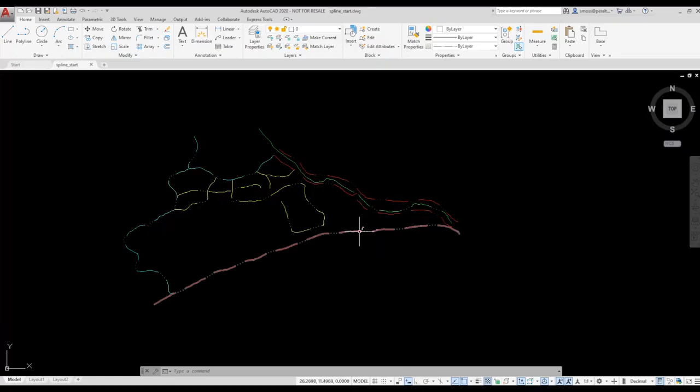I select one of the splines. Notice that the CV frame is currently set to hide. I'm going to change that to show. I close the Quick Properties dialog and zoom into the selected spline. Now you see the control vertices used to designate the shape of the spline.

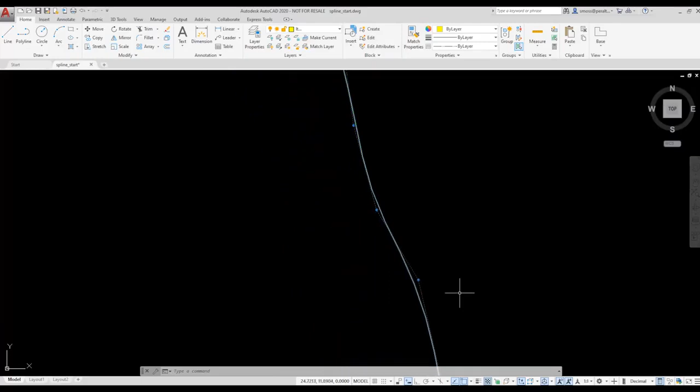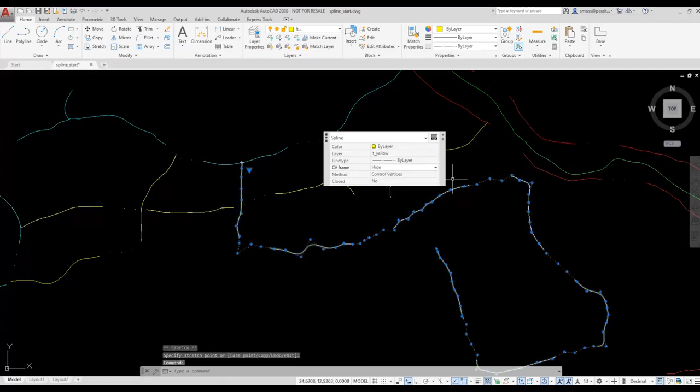These control vertices aren't plotted, but hiding them can make your drawing easier to read, and you can turn on visibility, like I just did, to make it easy for you to modify your spline. To modify the spline, just select a control vertex and adjust its position. To hide the control vertices, just reselect the spline and switch the CV frame back to hide. Now when I zoom back in, you don't see the control vertices as they are hidden.

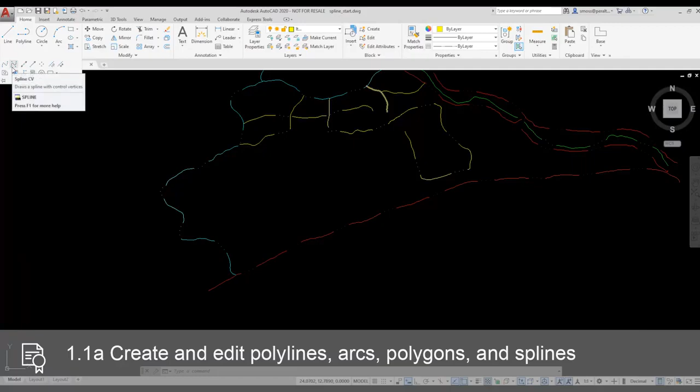I'm going to switch to the LT yellow layer on the layer drop-down list located on the ribbon. I'm going to be placing a spline. The spline tool is located on the extended panel area of the draw panel on the home ribbon. There are two spline tools available, one to create a spline using fit points and one to create a spline using the CV method. You can also just type SPL to start the spline command.

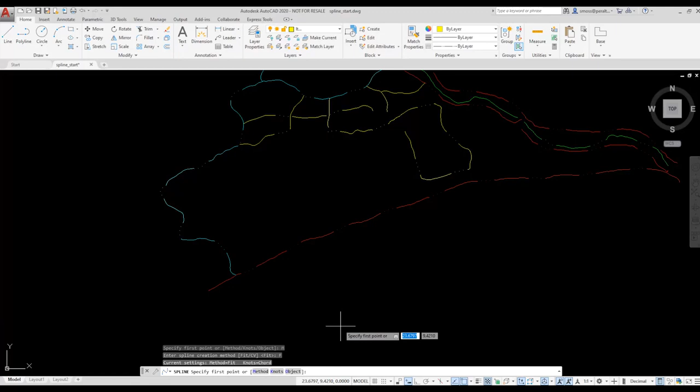I type SPL to start the spline command. On the command line, I have three options: method, knots, or object. The current method is set to fit. I can right-click to select method to change my method, or I can left-click on the word method in the command prompt. I am now provided with two choices, fit or CV. I select fit. I can select fit from the right-click method, or press enter to accept as the default.

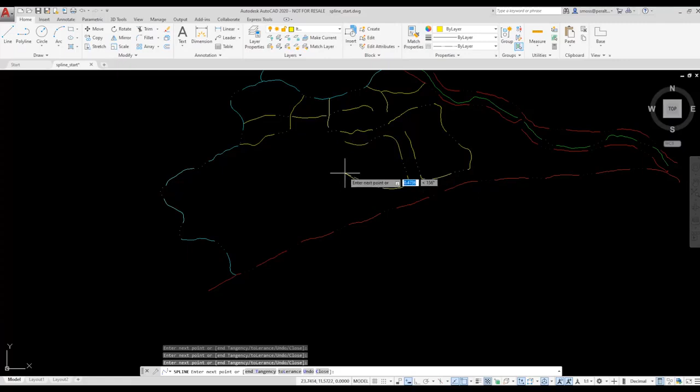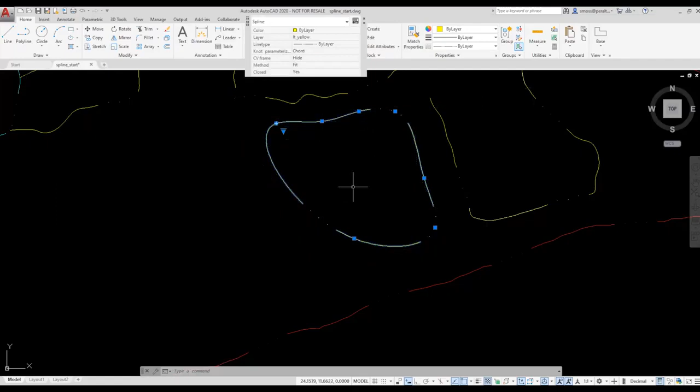I select some points, then right-click and select Close. I select the spline I just drew. The Quick Properties dialog displays that the spline uses the Fit method and the CV frame is set to hide. I change the CV frame to Show. So even though I created the spline using the Fit method, I still have a CV frame I can use to modify the spline. Or I could select one of the grips available on the spline to adjust the spline shape. If I adjust the spline shape using a grip, the CV frame returns to being hidden.

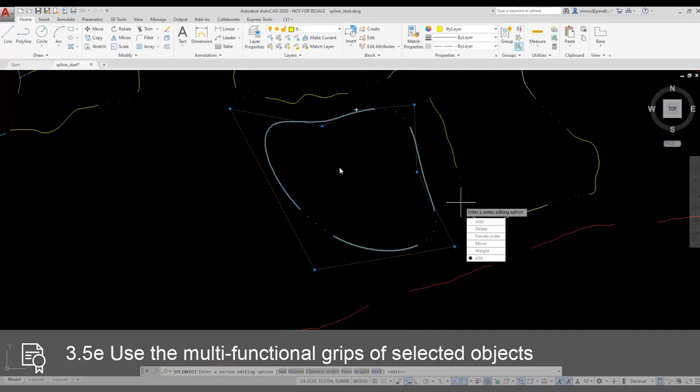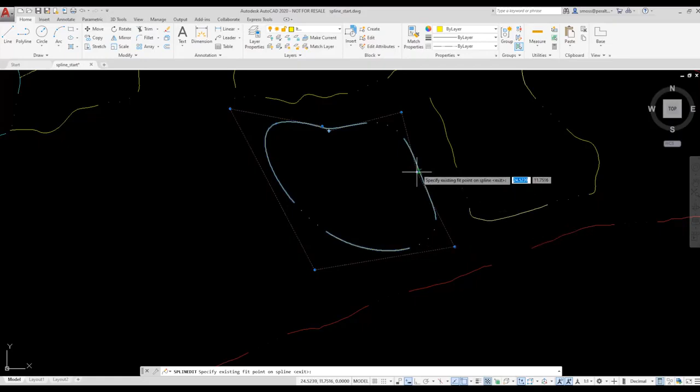With the spline selected, I right-click and select the spline menu. I select Show CV Frame and the frame is displayed again. I select Edit Vertices. I now have the option to add, delete, or move vertices. I select Move. I left-click to adjust the position of the vertex. I can advance to the next vertex by selecting Next and then adjusting that vertex's new location. I can also use Select Point to select any point on the spline to adjust the spline shape. To exit this mode, I press Exit, type X, or right-click and select Exit.

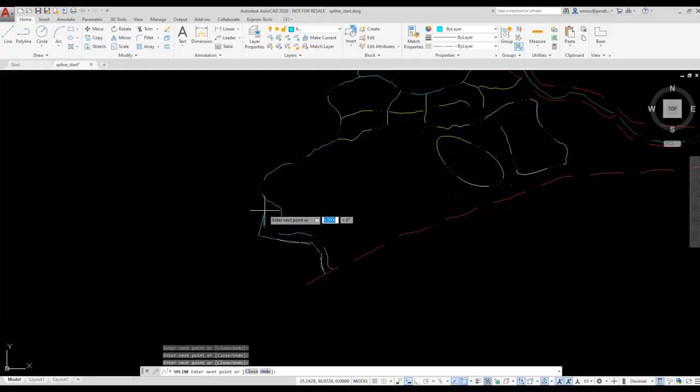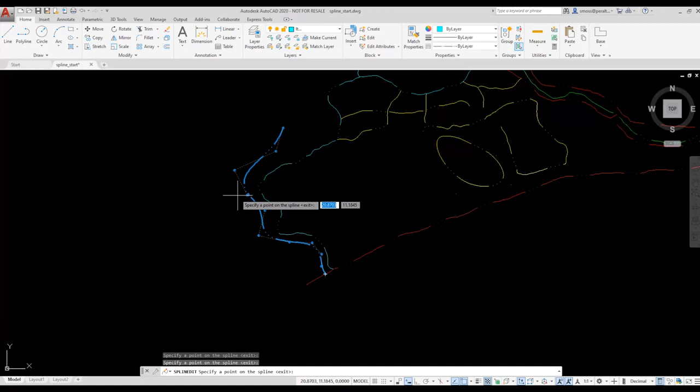I'm going to switch to the LT cyan layer using the layer drop-down list on the ribbon. Next, I'm going to draw a spline using the CV method. I select the Spline CV tool from the ribbon. Notice as I draw, the CV frame is following my spline. To modify the spline, I need to select it. To add a control vertex, I right-click and select Spline, add control vertex. I then left-click to place the new control point. There is an advantage to converting splines to polylines, and we'll look at that in the next lesson.